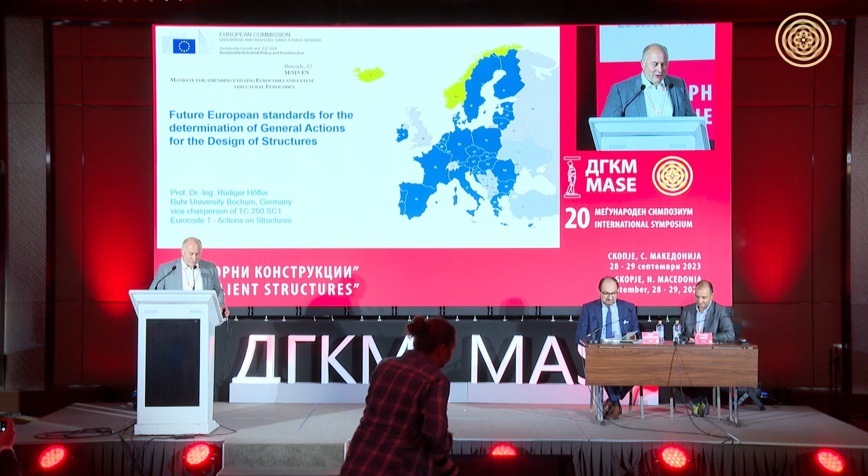Thank you very much for your kind introduction. Yes, to be an honorary member of MASE is always a big joy. Every 2 years I'm allowed to come here and participate in your esteemed conferences. Ladies and gentlemen, it's now late in the conference, and I think my task is not to produce too much delay. We have attended very ambitious lectures. Especially the invited lectures have brought us visions and shown us how exciting our field of activity is.

My presentation brings us a little bit back to everyday work, as we are every day guided by codes. Codification is something where a lot of experience is in, and therefore I'm happy to be in the circle of experienced experts in the code work. I would like to inform you briefly about future European standards. Please note the subtitle, General Actions, so it is about actions. And I'm doing this as Vice Chair of TC 250 SC1.

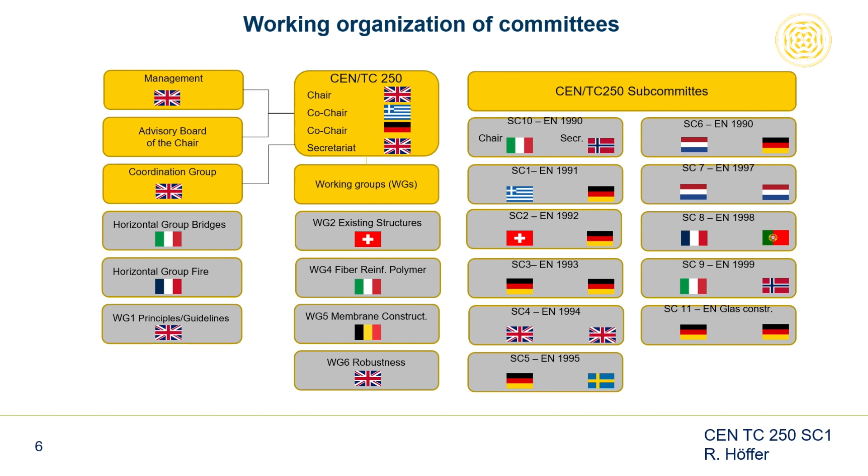The coordination group has its seat there, and TC 250 has a variety of contributors there, and you can see that many countries are contributing and some countries not. And that is, of course, a question of resources, a question of tradition as well. I must really say, and this is my personal opinion, that the number of flags to be seen here could be really increased.

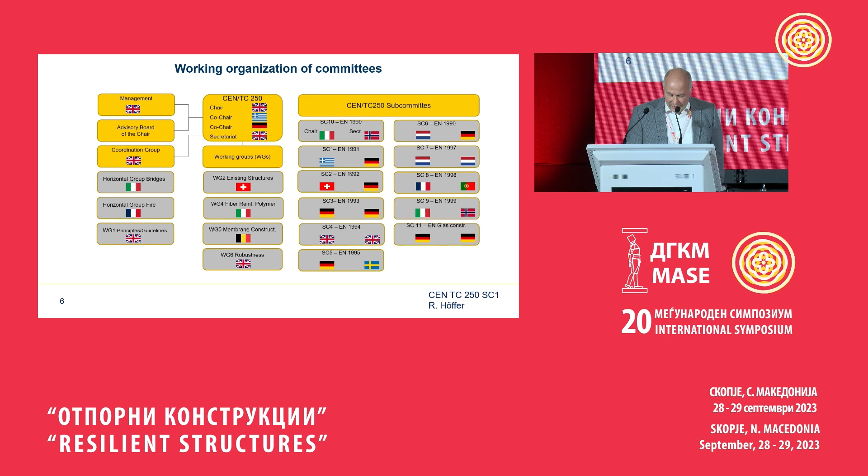The implementation in the countries is another question because national application documents must be produced, and that, of course, will bring a lot of additional effort and time will be used for that. After these introductory words on the procedures, I would like to go a step forward with some remarks about the different parts, but that shall not take too much time.

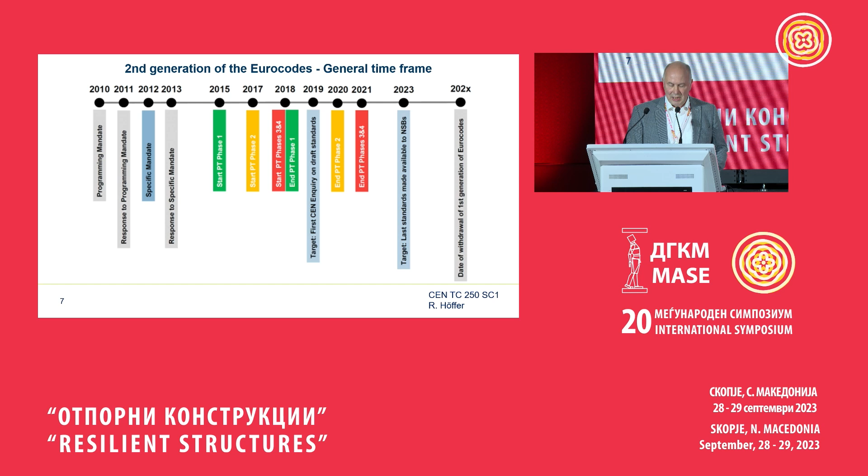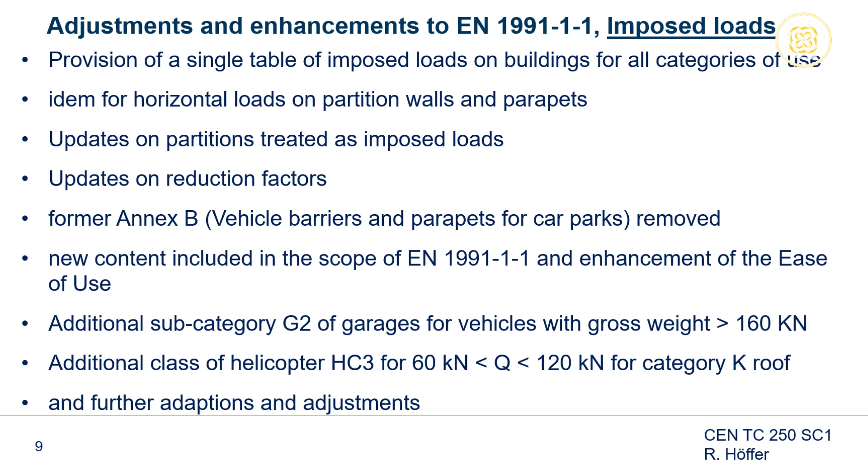Some adjustments and enhancements have been done, but these are solely of editorial, maybe a little bit more than editorial changes only. There are also new values due to the fact that, for example, imposed loads are increased, especially for vehicles. Vehicle weight is growing, especially due to electric cars, also helicopter weights, also garage loading, things like that, and further adaptations and adjustments are enclosed.

But I think that will bring no problem, and there are a lot of NDPs so that one can fix such a new code with own knowledge and own measurements in the country.

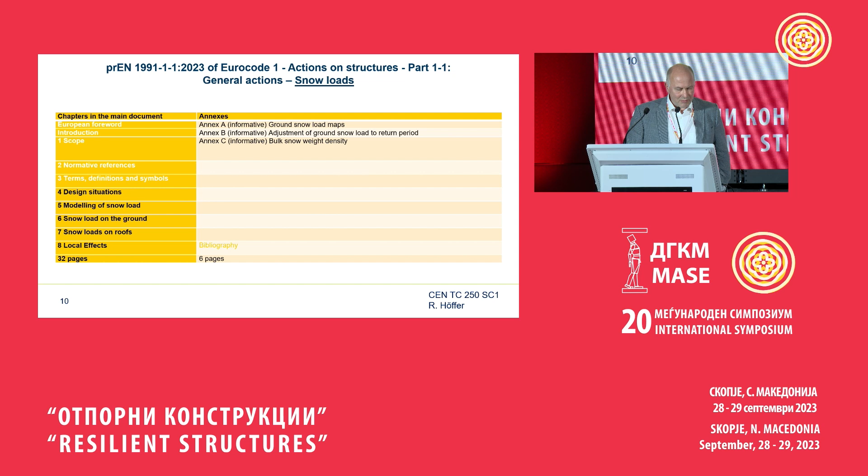Snow loads, there was more discussion here, but the extent is also not very large. Again, the first 4 chapters or 5 headers in the regular schedule, and then we have here design situations, modeling of snow load on the ground, snow loads on roofs, local effects, 32 pages. It follows again the classical pattern, but we have here introduced also, so if I say we, then the working group which was responsible for that, new models for snow loads on the roofs.

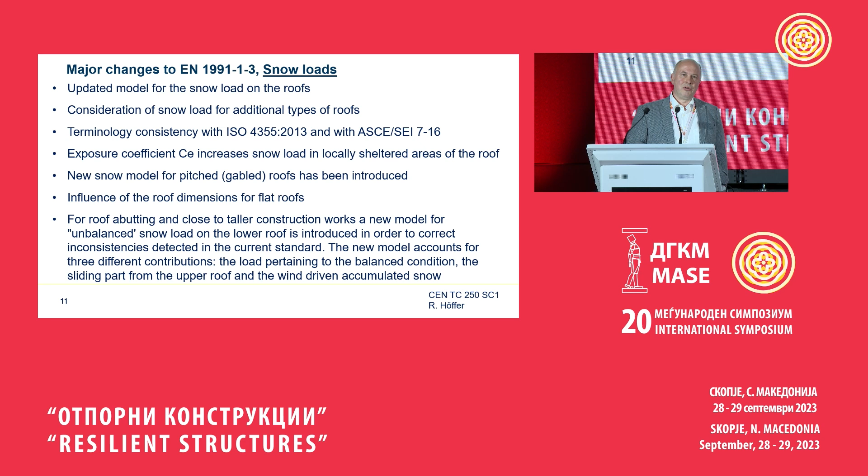And this new model takes account also about the question, is the right thing to use the characteristic value of snow load on the ground, or do we have to look for something more forwarded, and that could be, for example, the question about the size of the roof. If one has a very large storage hall, then the snow load on the roof must not any longer be reduced with the shape factor 0.8, but now there is a stepwise increase to 1.0 due to the fact that there have been building equipment developments to insulation, and also the pure size of the building will avoid snow drifting, so that 1.0 is the right value.

That has been discussed many times and will give, of course, some impact on static design. Of course, the building stock has not been changed then, but if new buildings will be erected, that has to be considered. Exposure coefficients are a little bit adapted, new models for pitched and gable roofs, and also abutments have been treated. So also nothing serious, but maybe there is the necessity to review that in the national standardization body and looking at reflecting comments from the expert public.

Maybe you can see here that most of the annexes are informative. That means these are recommendations, and the national standardization bodies are free to formulate adaptations, also to formulate completely new annexes. But the annexes as they are, they fit better in the procedures and are also reflecting the state of the art. There are only a few normative annexes. That means when accepting this code, one must use these normative annexes, otherwise the code is not applicable. So, for example, we cannot apply Chapter 5 or Chapter 7 wind actions when not having at hand some aerodynamic coefficients, and these are given in the annexes C, D, and E, and so these must be normative.

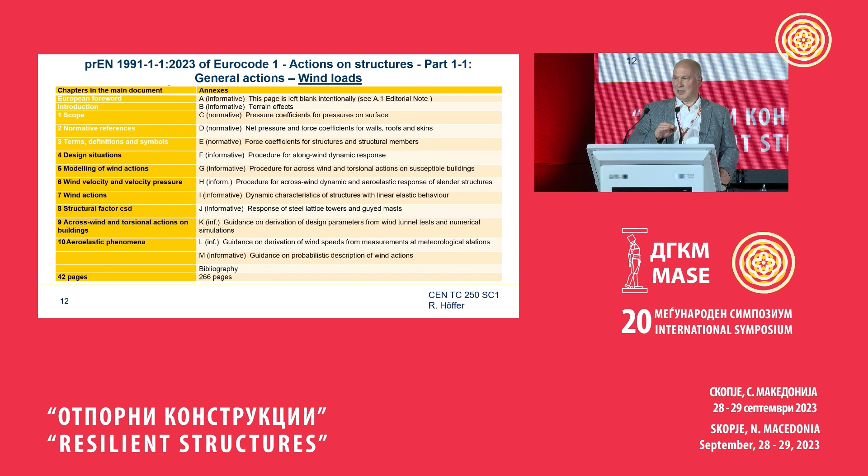But in this annex again, at several places, there are nationally determined parameters. So, for example, when measurements are available for certain structures, then it is possible for a national standardization body to change also piecewise coefficients there, if it is allowed by a nationally determined parameter. So the pure extent of this code will be problems when creating the national annexes. But let me please at least give you some examples for that and some guideline, and also maybe this is also some motivation to get into the topic.

The scope of the application of the standard has been increased to 300 meters height. So one could ask, is that really necessary? Yes, it is, because we see that in the growing cities in Central Europe, we have building heights that really come to this limit.

The highest office building in Germany has exactly 300 meters, and buildings in Great Britain could not be designed before based on the code models for wind, because these wind load models were only up to 200 meters. And that was, of course, a deficiency of the old code on wind loading, and now it has been extended to 300 meters, and by this also created some interesting comparison.

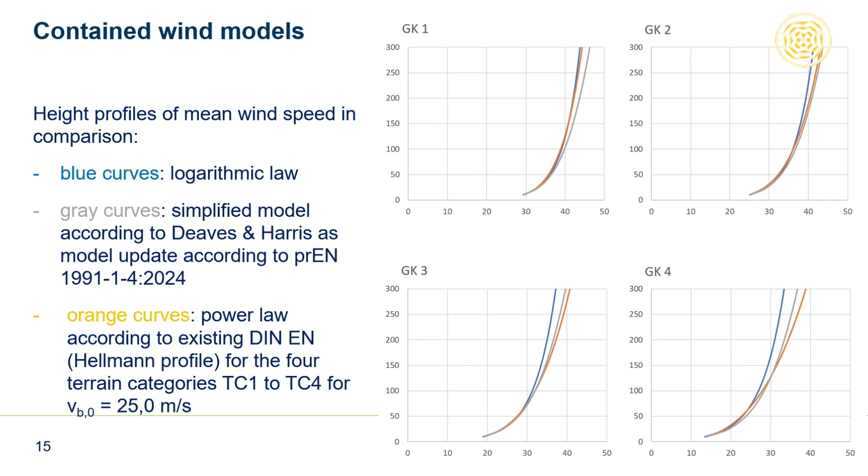And we can see that at this terrain category with a low roughness on the ground, the blue and the orange curve fit well together. Well, this is not surprising, because the logarithmical model in first instance reflects small roughnesses on the ground. So let us say green grass near to the coastline, flat terrain, no houses, low bushes. That is terrain category 1.

And that was developed by Professor Prandtl from Göttingen in 1905 as a good profile. The first time it was available to know something about boundary layers, and that was implemented immediately to regulations. And so the Hellmann profile is the verification by meteorologists in the atmosphere.

That fits well. But if we go then, for example, to terrain category 2, which is the standard terrain category, I would say it is terrain around airports, or in flat terrain with houses and bushes and some small, let us say, industrial buildings. There we can see that now the picture is different. There is a deviation as well from the orange curve, the Hellmann profile, and also of the gray curve from the logarithmic profile, and that has been adapted now here.

The more roughness we have, the higher is the difference between the theoretical logarithmic curve and the validated curves from meteorology, and therefore now, using this new wind model, it is possible to extend the code to 300 meters height for all those countries who have not automatically at the beginning used the Hellmann profile.

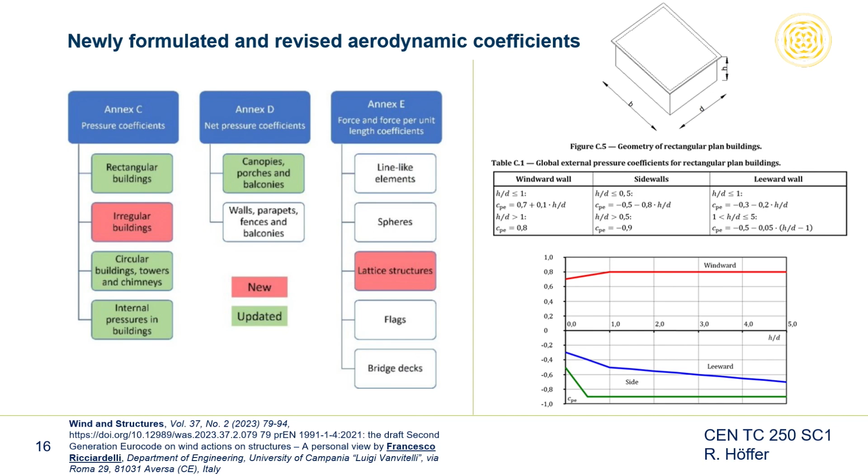In the countries where seismic activity is much higher than in Germany, there is always a lot of horizontal stiffness due to that point. But in northern and middle European countries, it is always a question which horizontal type of loading gives the decisive values for stiffening. And for example, for bridges and for high-rise buildings in our area, wind is mostly the relevant parameter for horizontal stiffness and not seismicity.

Therefore, it is important for industries and consulting offices in that area to be able to pre-calculate quickly foundations and stiffening systems. And of course, varying shapes of buildings have been considered in the new code.

These are patterns which really exist. One had done some work to make it a little bit more abstract, a little bit more general, but these are building systems which really exist, not only in plan view or section, but also forms like this are now possible and regulated.

A special effort has been done for dynamics. We have the phenomenon that wind excites buildings to resonant oscillations, susceptible buildings with low damping, typically high-rise buildings, bridges, and towers. The standard structural factor CsCd considers a size influence, which is a favorable effect lowering the load, and a dynamic influence, which excites resonant oscillations, increasing an equivalent static load.

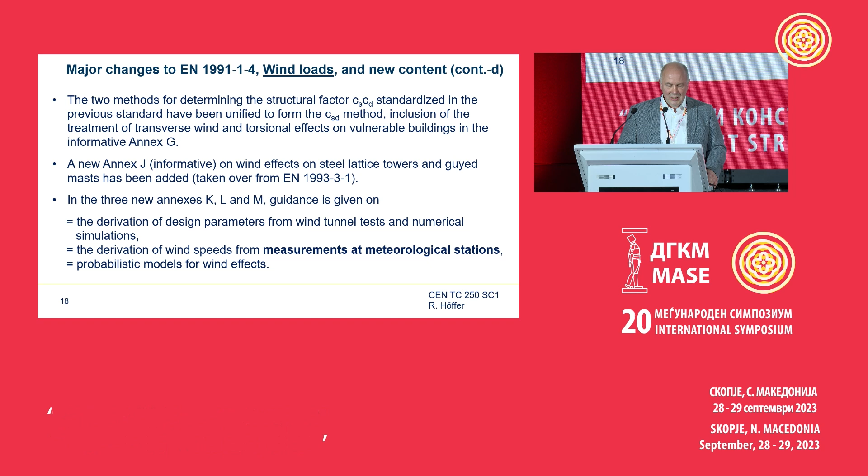Both are used together, and we have now put into a little bit adapted procedure where also mode shapes with changing sign can be considered. That is the CSD method, now in the informative Annex G, and communities must decide whether to adopt it or not. It is an informative annex, but it is an offer and a development of the formerly relatively inflexible procedure. Annex J was a special wish from the British for steel lattice towers and guyed masts.

We have three new annexes, K, L, and M, which take position with respect to very modern approaches like numerical, CFD methods in flow dynamics, which are more and more used. That needs guidance and regulation, because there are already at least two big design programs that allow for that, and it must be regulated since it can deliver non-validated results. This is not a topic of today, I just wanted to make this remark.

Also, the derivation of wind speeds from measurements at meteorological stations is now commented on in the code, and probabilistic models for wind effects as well. Of course, all these annexes are informative and are used to inform the professional public.

Another thing is very interesting, which cannot be solved so quickly: a European wind zone map. This was intended to be implemented into the code, giving the possibility of having only one wind zone map for all Europe. Apart from the problems we already have nationwide, for example when bridges are crossing borders, or bridges are built at positions where no meteorological stations are, then one runs really into problems.

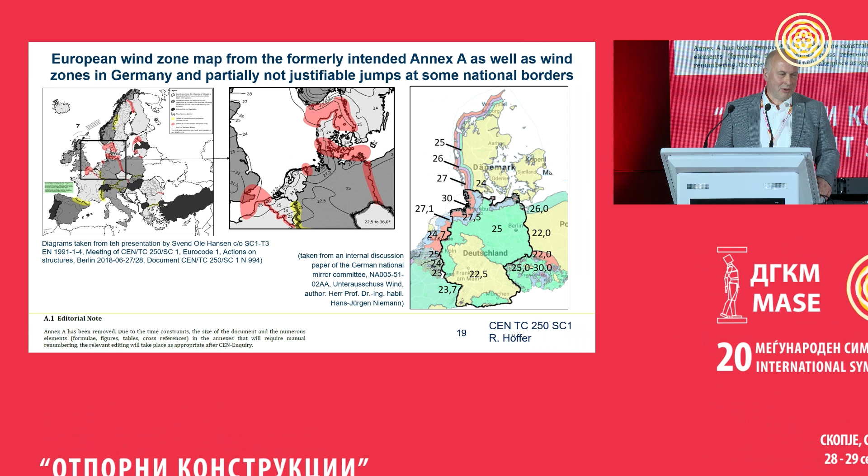We are now working at the new Sava Bridge in Belgrade, and there is a similar case. The meteorological station is a little bit apart, and it's difficult to define a fixed wind profile there, also because it is a river valley, and canalization might occur. I hope to be able to inform about that a little bit later.

But a special point gives a little bit of concern, namely the jump of characteristic wind speeds at national borders. Of course, that cannot be, that can only be in certain cases. Please take it with the right tone that I use the Danish example: in Denmark, we have big differences between German and Danish wind speeds.

Maybe you can see it best on the right-hand side. There we have our wind zones 25, 27.5 and 30 near the border, and the Danish have lower wind speeds, although when thinking about North Europe, this is the area where there's a lot of wind.

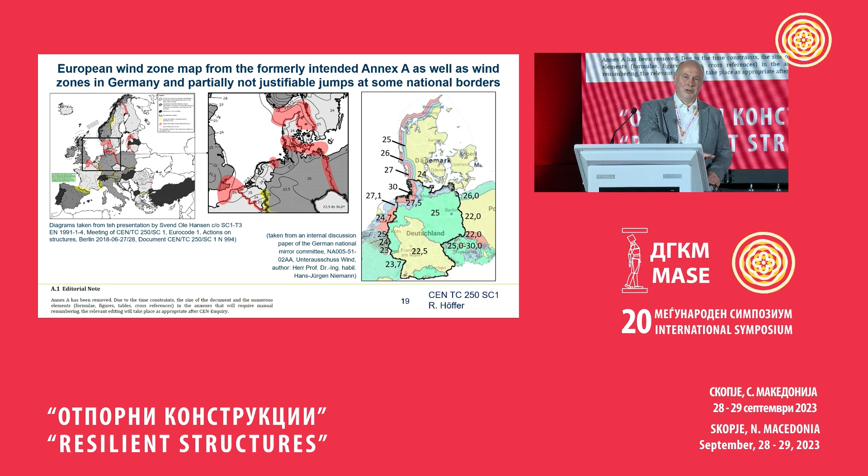I discussed a lot with experts there, namely Svend Ole Hansen and other people from that country, and they found out that part of these measurements have been done at 85 meters height on platforms and bridge pylons and then calculated down to 10 meters height, whereas the Germans do the other way around: they measure at 10-meter height and then evaluate it directly. But this is something that must be harmonized in Europe, because we really have problems with that.

I was also a witness and expert working out a written paper for a court about damages near the German border in Denmark, and it always came out that maybe the wind velocity was taken a little bit low. But I have the feeling that we are on a good way, so we will find harmonization in the near future.

Other places are also present in Europe. For example, the borders between Great Britain and the Netherlands, Great Britain and France - there are all jumps in the wind profile, a big problem for a European wind zone map, and that will take some years until that appears.

Another point is vortex shedding. Vortex shedding is something that brings stacks and chimneys really into danger, not by sudden cracks and failures, but mostly by fatigue. We have two different vortex models in the current code.

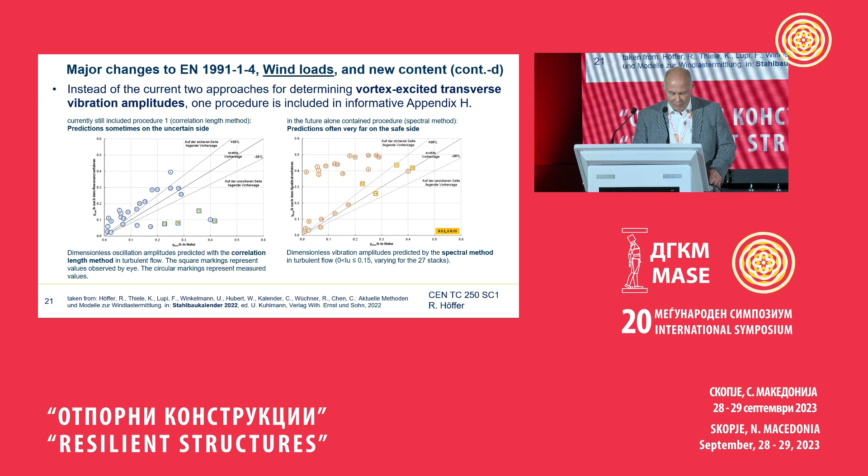Industries prefer the left-hand side, owners prefer the right-hand side, and we must find the right solution here. We did that by removing one of the methods from the code and fitting the other one through a lot of investigation, especially again a Danish laboratory contributing there, and also German laboratories, including our own, and the result is now offered to the public.

There should be some comment. Now let me speed up for the thermal actions - not much to be said. I can jump here and immediately point out that characteristic temperature components and temperature differences have been found. The new thing is that certain bandwidths are introduced, which again create effects for bridges with respect to their temperature dilatation. These uncertainties are again a matter of discussion in the national standardization bodies. It's quite clear that these uncertainties are higher where temperatures are higher, so there is some gradient from north to south, and every national standardization body must find its own solutions.

I jump over this slide and go to the accidental actions. More emphasis has been put on consequence classes, and there is also now a new annex on debris. Internal explosions have always been implemented - these are gas explosions in buildings, housing - and the compatibility with the basis of design code, Eurocode 1990, has been increased. And then there is a totally new part, and that is atmospheric icing.

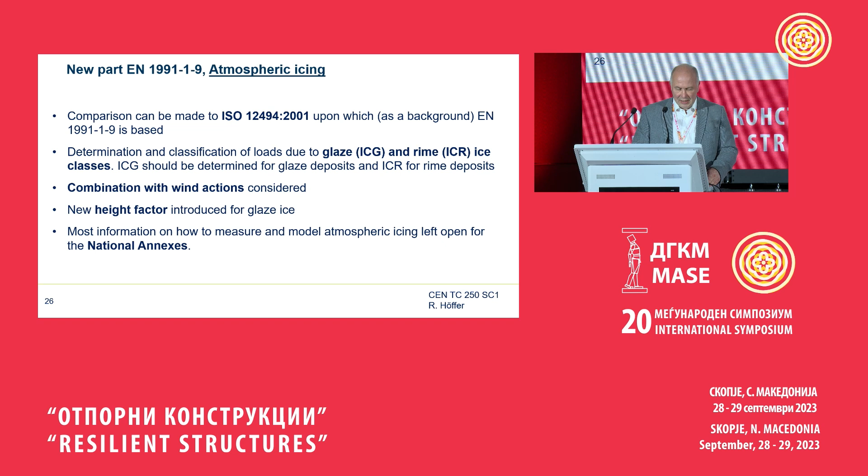That was designed after the ISO pattern from 2001. We again have glaze and rime ice classes. I think that is known to most engineers, and it has been updated and amended a little bit here. There is now a height factor for glaze ice, and the models are left open for the national annexes. There is a lot of flexibility.

By the way, I should say we are currently running a big project involving two climatic wind tunnels. There is one climatic wind tunnel again in Denmark, so there's a lot of cooperation with Denmark - in Lyngby they have a big climatic wind tunnel, and we are going there to do a study on atmospheric icing. The second wind tunnel in Europe working with that is in Prague, at the Czech Academy of Science, and comparative experiments will be done there too.

Now we have seen the last three codes commented on, or three of the codes commented on.

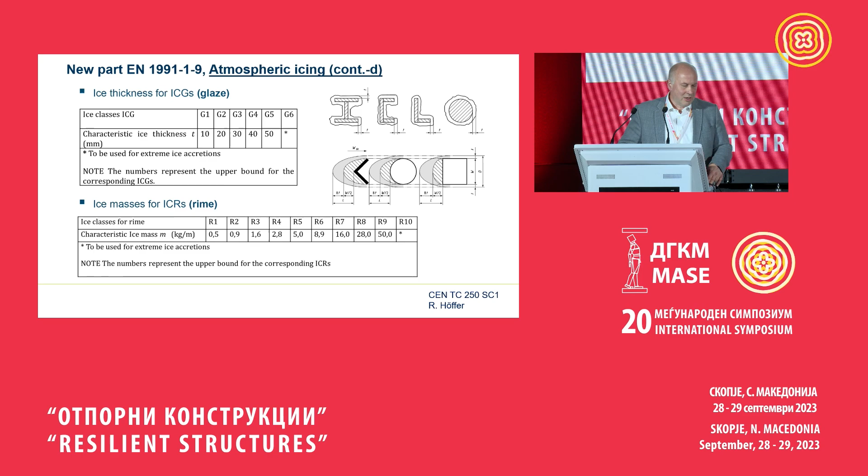They have to do with climatic actions. The question is immediately there: climatic actions have to do with climate change issues. How can we tackle that? Here, of course, uncertainty grows tremendously. That's also something related to the fuzzy question I posed to Professor Katzi this morning. Markov chain and Bayesian procedures cannot be used here because the uncertainty is too big and has no clear pattern. This is an open question, how to tackle that.

What happens is that flooding can be seen in a tremendous way in your neighboring country, Greece, just in the last days and some weeks ago. Tremendous effects. We can prove that with high confidence intervals, statistically also. A change of the extreme values can be seen, clearly visible, can be proven, and we cannot deny that this effect is there, especially regarding flooding.

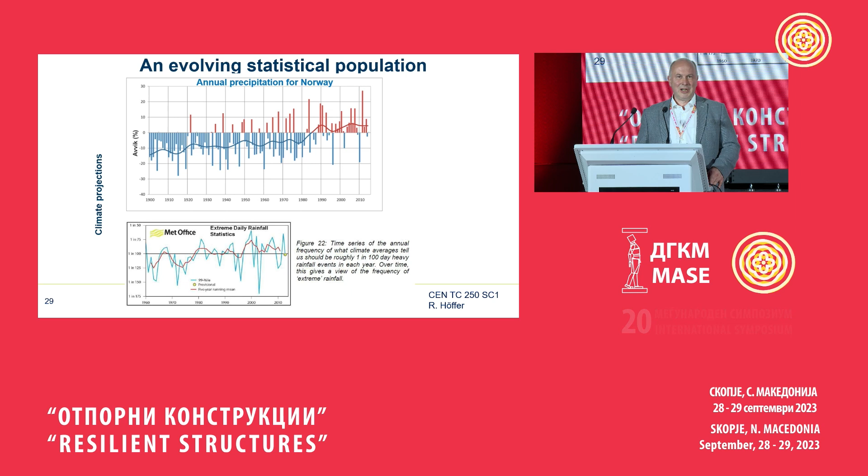By the way, I did not comment on the new code on waves and currents, but in the new code for waves and currents, these parameters describing these effects must be implemented. And that is a little bit far from state of the art because the predictions are uncertain.

We have seen, for example in Germany, increased icing, although temperatures are higher than before. Icing is not lower, and also snow loads are not decreasing. That has to do with the humidity content of wet snow. Also here, the characteristic values have high uncertainties, and temperature is, I must say, the value that can be measured best, because there only simple sensors are necessary, and also long data bases are available.

Here we find an example from the Czech Republic, done by the Klementinum in Prague, and they found out that they have to increase their shade air temperature and the temperature differences for buildings.

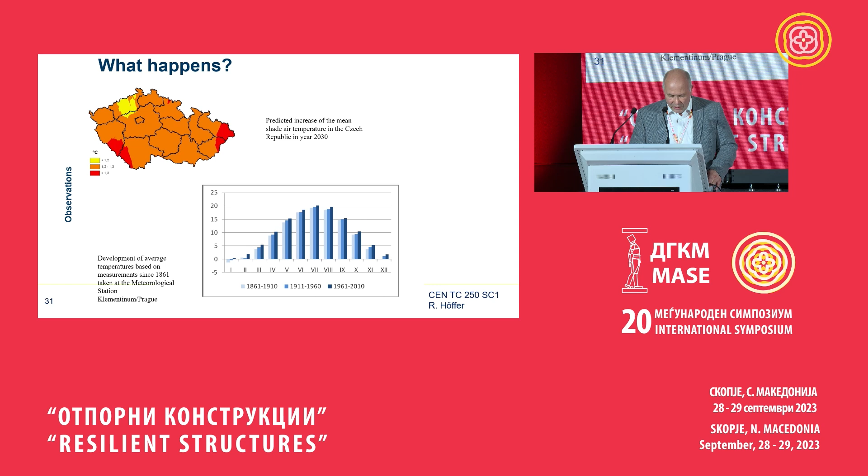When considering wind, we have to face a certain problem. From all climatic sources of loading that we know, wind is the most unknown - the most extreme wind is the most unknown one. Not only extreme wind, also everyday wind. We are not sure if the quantity of storms will grow. We are not sure if the extreme values are growing at the moment. We don't know if the number of tornadoes is higher.

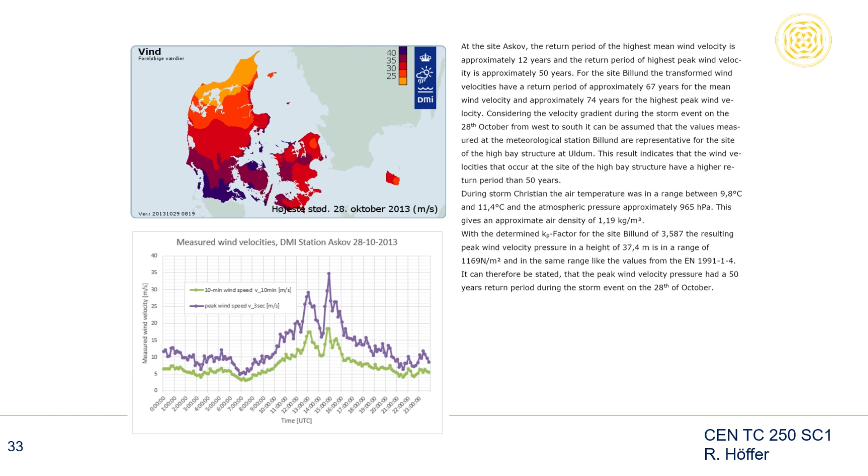For a pure mechanically generated turbulence like a deep pressure wind zone - one of these deep pressure zones that come from the Atlantic and cover Europe producing storms - that is well understood. We know the gust factors which belong to that, something between 1.4 and 1.7. But here we can see that there was a factor between the green curve, the mean value, and the measured - not estimated, the measured - gust wind speed of more than 2.

So absolutely unusual, and it was not clear what this was. After some consideration, it came out that this was a thunderstorm, but a special thunderstorm, a downdraft, implemented in the first vortex of the deep pressure zone. These effects are temperature dependent, and they become more frequent. So that is a very complicated source for a new phenomenon that comes up more often.

So I guess that the gust factors have to be improved, and that is also something where a lot of research is ongoing. The Italian Giovanni Solari took an ERC grant on that and formed a big laboratory in Genova. Very unfortunately, Giovanni died one year ago from a disease, and his team is continuing this research, along with other groups in Canada and the United States. That will surely change our gust factor.

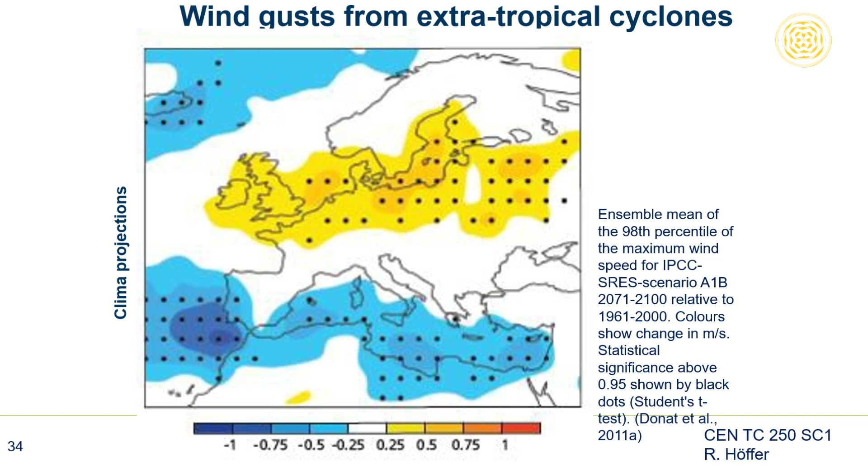And what you can see here with yellow colors, that is a slight increase of wind speed, of extreme wind speed, and blue color is lower wind speed, and that is a prediction to the year 2100. So within the time frame for which we plan important structures. But the difference is not so large, so we can see that in Europe we come up with up to 0.75 meters per second more. That means only very, very moderate corrections of our characteristic values. That will be absolutely different for other climatic actions.

So let me come then to a conclusion for the climate change coverage. That has been proposed by a document from TC 250, and there will be introduced a factor, but this factor is, from my point of view, pure formalism, because this factor has no life inside it. There is no number for this factor. At the moment, the factor is 1. It's only a form to deal with it in future. And I think much more work of enthusiastic, especially young engineers is needed, because we cannot come up with such a thing and just say national standardization body, find your factor. Then it's not very interesting to do that.

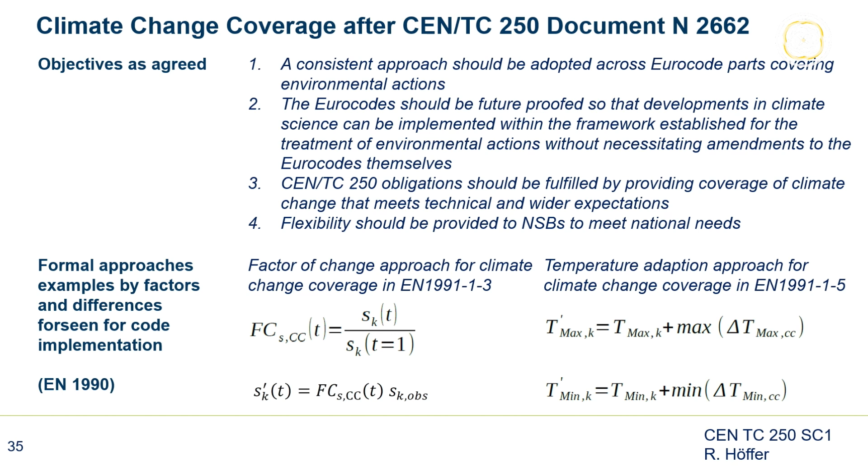So to end my short presentation here, I would just give you an overview about the codes I was reporting on. The status is that the inquiry phase for these parts is running, with the exception of wind actions. That is a year later due to the big extent of new procedures which have been implemented. The inquiry phase means now opinions and comments from the expert public are asked for, and then shall be formulated as a comment to the project teams, or better said, to the working groups, and then such a proposal shall be implemented or not.

We have found out that user friendliness was not put into question by the test users and also by the publics that got already the codes. The harmonization was also very welcome, with the exception of very few procedures. Especially positively accepted was that the codes are open for new materials and new methods. So that was commented very positively on. The climate change issues were not commented at all because nobody knows numbers.

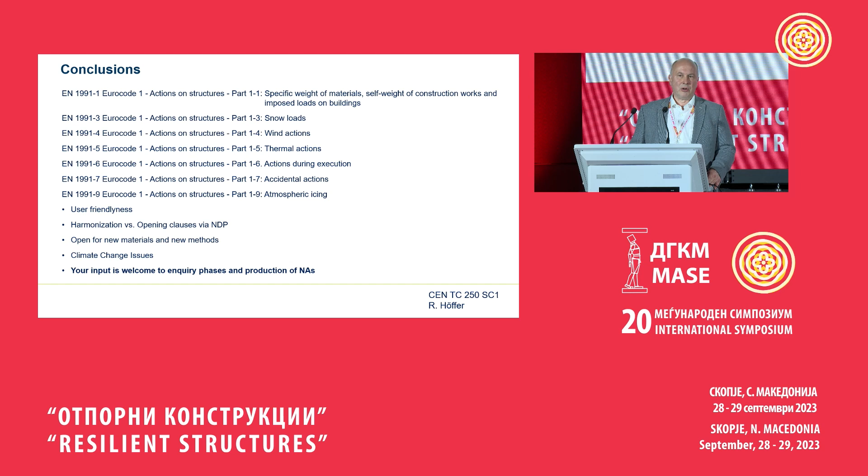And at the end, I must say that your input as people who work every day with codes like this is the most important thing, to discuss the codes now after the experts have made a proposal, and every opinion is very welcome to the inquiry phases. And if your country or your group is not part of an inquiry team, then I could only invite you to send on the short draft just a comment to me myself, and I try to bring it into this committee, and then maybe at least the opinion is not lost.

So, production of national annexes is the work of the next years, and with that I can close, and thank you very much for your attention.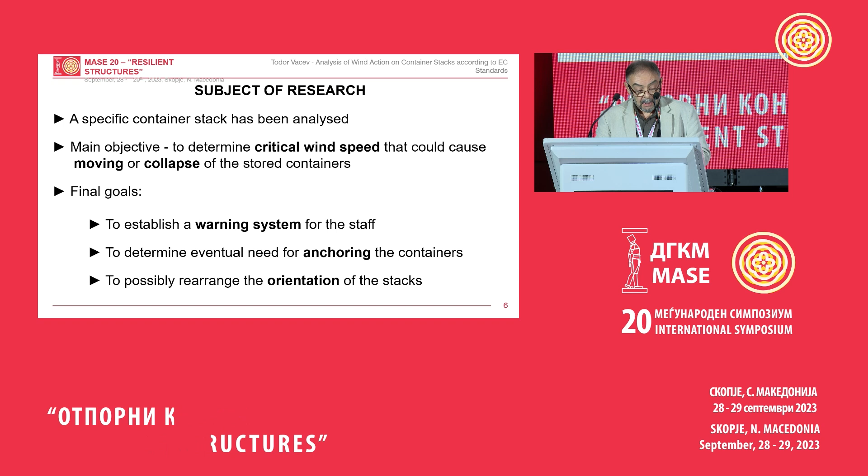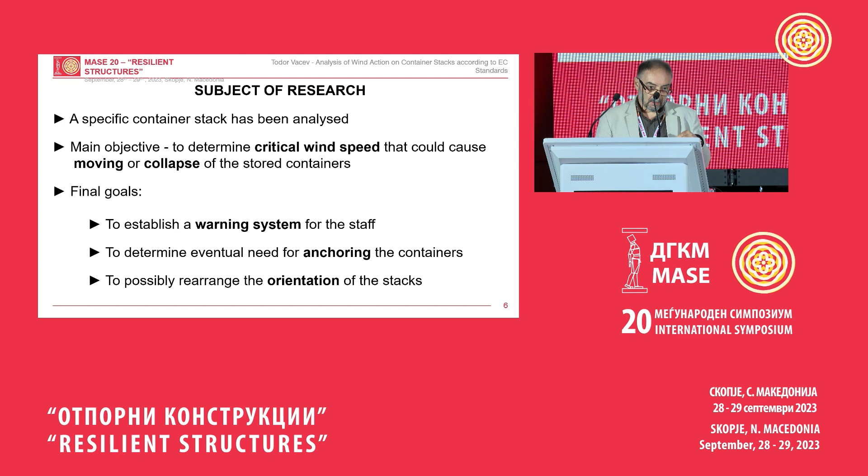The second reason was to determine the eventual need for anchoring the containers. Namely, in common practice containers are just put on the ground, and some are put above and above without any fixing, any anchoring. In some cases, especially on ships, they are anchored with some chains, with heavy ballasts, and so on. And the third reason is for the operator to consider alternating the orientation of the containers with regard to the main wind direction on that site.

Problem was that there are numerous stacking combinations. There is no order, there is no established pattern on every site. So in this research we had to narrow the selection, and you can see on this scheme what we analyzed. 4 cases with 1, 2, 3, and 4 levels of storing. And to further narrow the research, we considered only empty containers, as they're more vulnerable to wind action than the full ones.

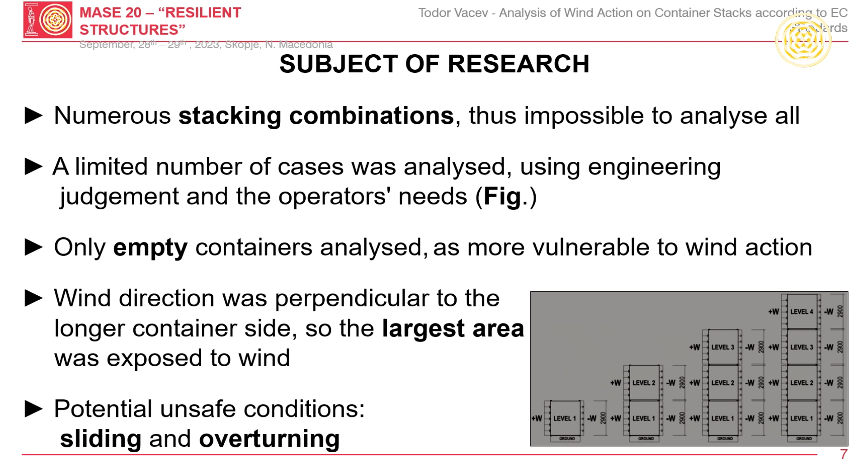Wind direction was treated as acting on the largest area of the containers, and unsafe conditions that were analyzed were potential sliding and potential overturning. Wind action was applied on windward and leeward sides. Lateral sides were excluded because they annul each other. They act in opposite directions.

But wind suction on the top side, on the roof of the container, could lift the container, and it could reduce the friction force. But in this case, we neglected that because it simplified the research, and also the containers have a pretty large mass, almost 4 tons, as you can see, so we excluded that. The container type is high cube, the largest one from the possible standard containers that are present on the market, and here are their dimensions. Wind intensity was calculated by the Eurocode standard.

Sliding and overturning are different phenomena considering the genesis of their arising, so they had to be calculated separately. And all cases were analyzed in 2 so-called modes. The safe mode, standard one for design, where we applied safety factors from Eurocode, and the purpose of this mode was to get some kind of wind velocity database for that site in order to safely operate.

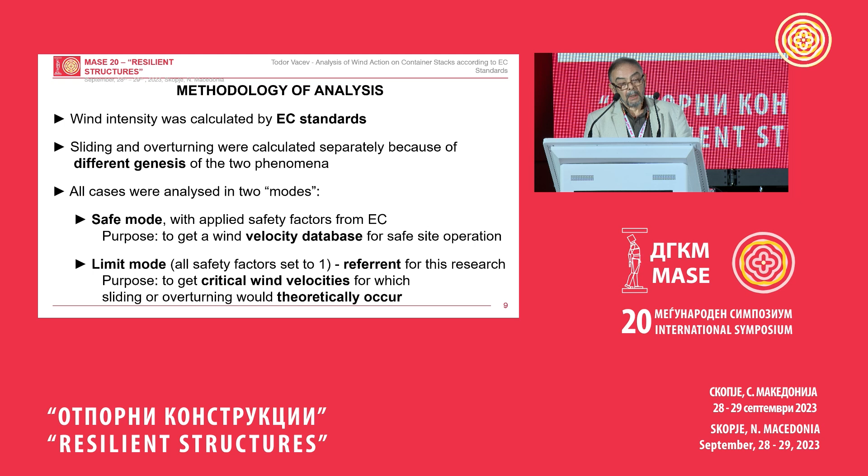The limit mode, second mode, all safety factors were excluded or set to 1, and this was a reference. We wanted to see what were the critical wind velocities where sliding or overturning should theoretically occur. The sliding check was simple, comparison of wind force and resisting force generated by friction. The overturning check was comparison between overturning moment from wind and stabilizing moment from container weight.

Regarding the friction, we had 2 types of contacts. The bottom container lying on the concrete pavement had a friction coefficient of 0.6, and the container that lies over another container, in that case we have steel over steel, friction coefficient of 0.4.

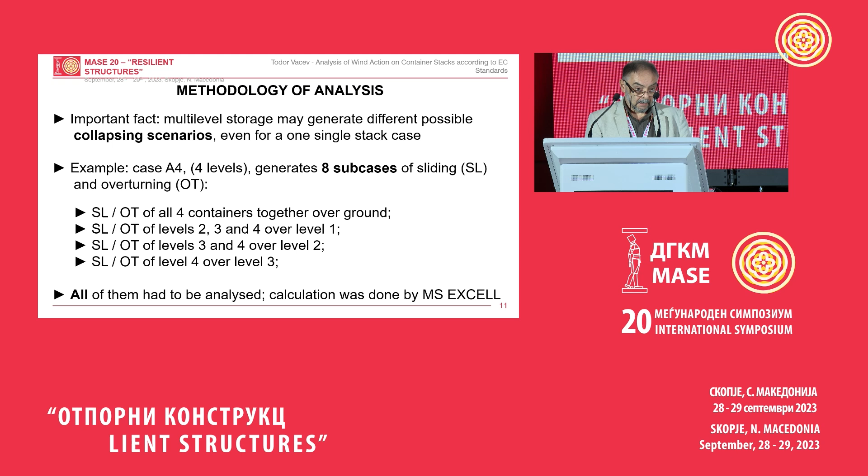The important fact is that this multi-level storage can generate many different collapsing scenarios. And that happens even in one single stack case. And here I gave one example. I will not read everything, but if you have 4 levels, it generates 8 subcases of sliding or overturning. And they are listed here, as you can see. So all of them had to be analyzed, and the number of calculations rises. It was done simply by MS Excel.

In conclusion, after the calculation, we observed that critical wind velocities for the limit mode are normally higher than for the safe mode. It's expected. But the differences are not uniform. They range from 33% for case A4.4 to 112% for subcases which are listed here.

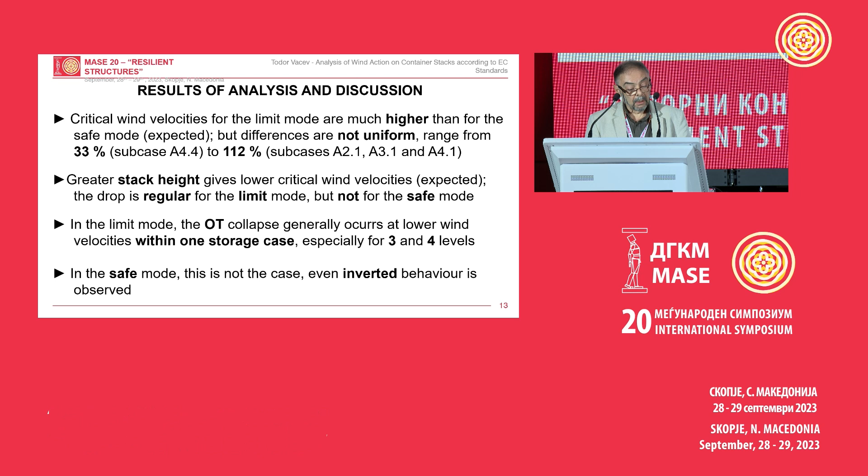Second, greater stack height gives lower critical wind velocities, logical and expected. But the drop in critical wind velocity is regular for the limit mode, but it is not regular for the safe mode. Also, in the limit mode, overturning collapse occurs at lower wind velocities within one storage case, especially for 3 and 4 levels. But in the safe mode, this is not the case. Even inverted behavior is observed.

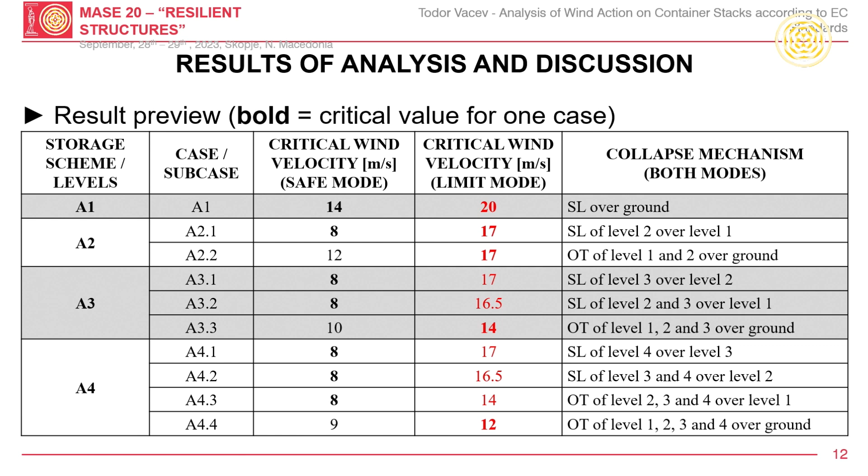As a conclusion, or several conclusions, we can say that the difference of critical wind velocities in the safe and the limit mode indicates that possibly Eurocode safety factors are over-conservative. Also, limit mode shows a more regular pattern of critical wind velocities when stack height is varied, and also when we consider only one single subcase.

Finally, both these conclusions suggest that some more sophisticated methods should be used, like contact analysis and finite element method, and also computational fluid dynamics combined with fluid structure interaction. At this moment, I can say that one such investigation is in progress, and we hope that we will soon have the results.

Thank you. Thank you, Professor Vacev. It's a really interesting problem that you analyzed. You were good with the timing, so we can take questions. Maybe I should go. Oh, it's okay. So, if you have questions. I maybe have a comment, if I may.

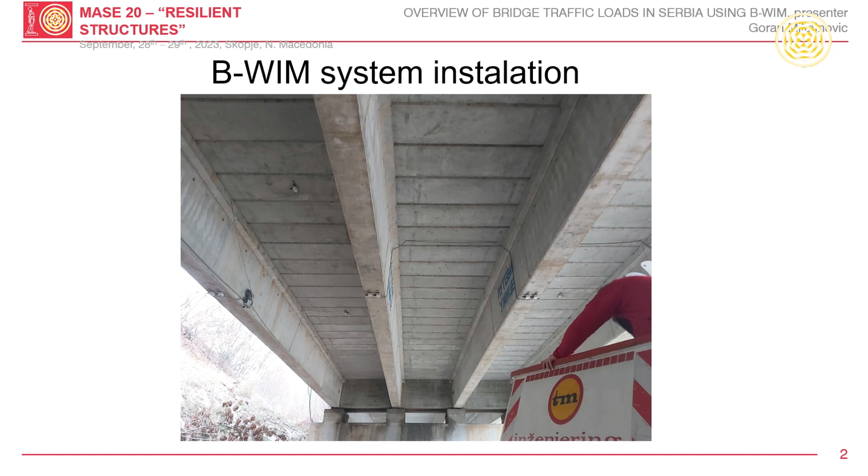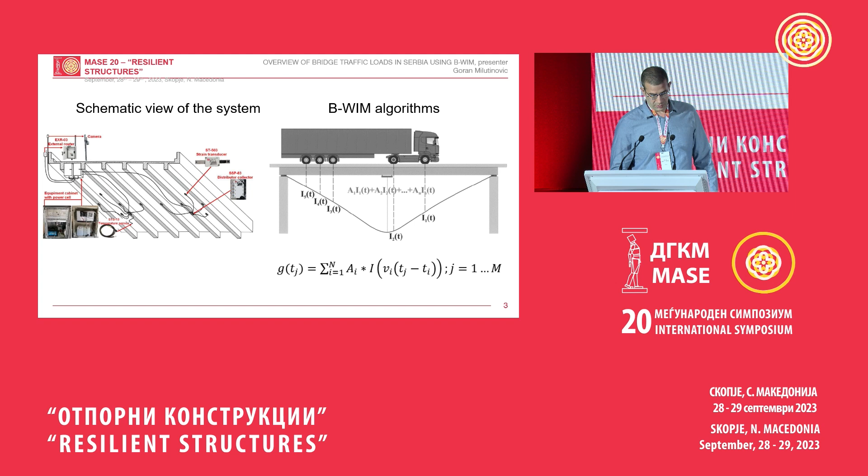So the sampling rate of this system is 500 samples per second, and if a vehicle is crossing a bridge for a couple of seconds, then they get a number of equations 2 orders of magnitude larger than the number of unknowns, the axles, and by some advanced mathematical tools, they are able to find out the unknowns, the axle loads. What's also interesting is they use the observed influence lines and not the theoretical influence lines.

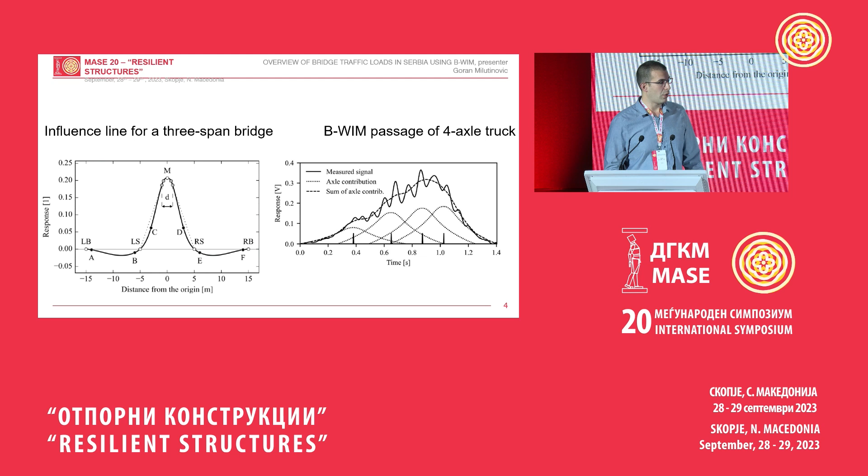You can see it's oscillating about the static effects, and basically, simply saying, they set a cutoff frequency. All frequencies higher than that are the dynamic component, and they're eliminated. What's left is the static component, and based on that, they're able to determine the static weight of the vehicle on the bridge.

So until now I was talking about the system. From now I will talk about the measurements that were done. Putevi Srbije, the bridge owners in Serbia, carefully planned the locations of the measurements, geographically covering the entire country from Zrenjanin to Pirot, monitoring freeways and highways, different types of roads.

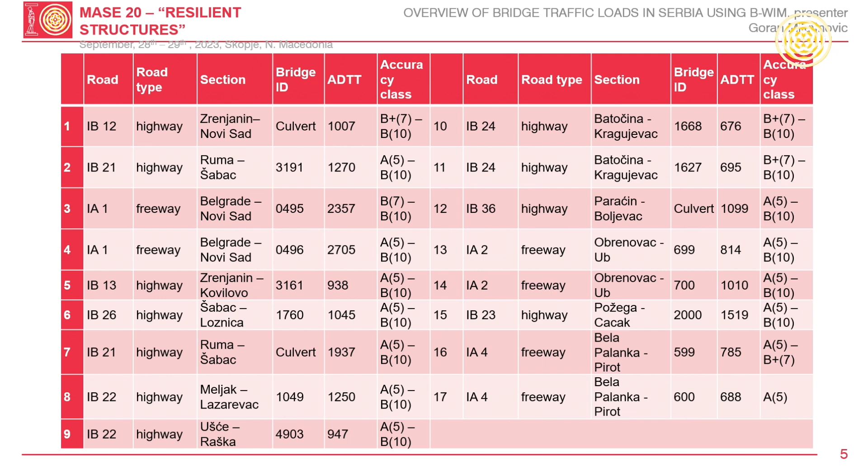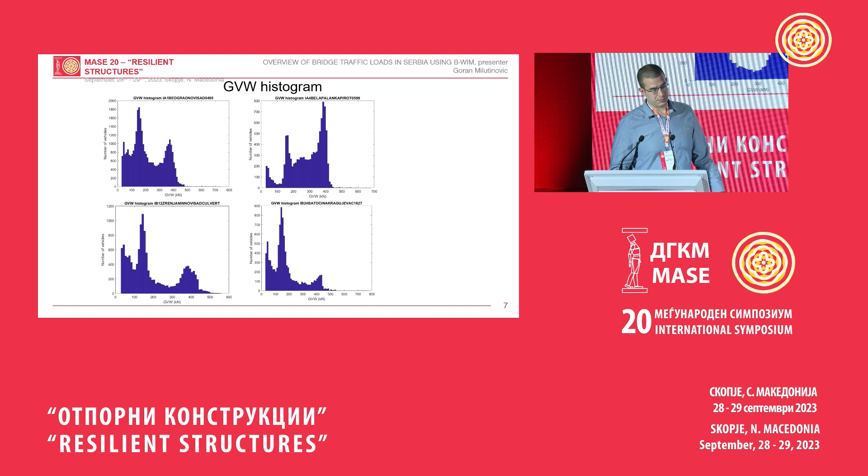Now this is GVW, gross vehicle weight. Given here are histograms of gross vehicle weight at 4 locations, 4 stations. You can see maybe 3 modes, the most frequent values, just above 3.5 tons, which is the limit for heavy vehicles. In this database there are no vehicles lighter than 3.5 tons. The next most frequent value is around 150 kilonewtons, and then also just below the legal limit for routine traffic, around 400 kilonewtons, after which there is a sharp drop, as expected because of the legal limit.

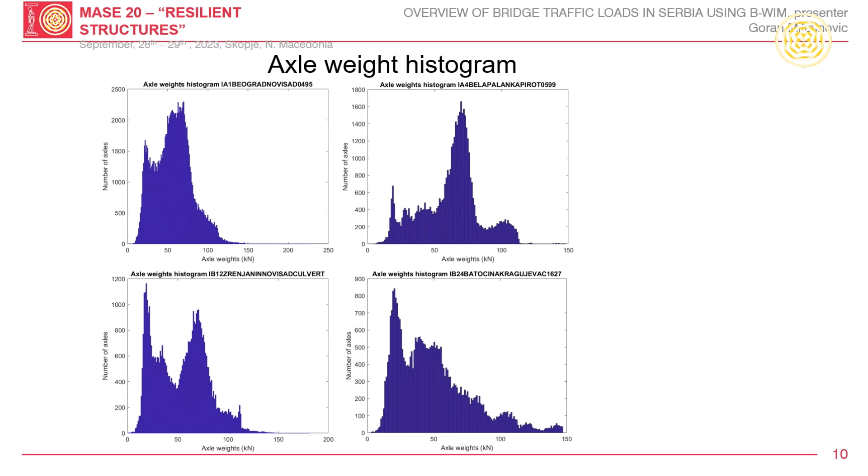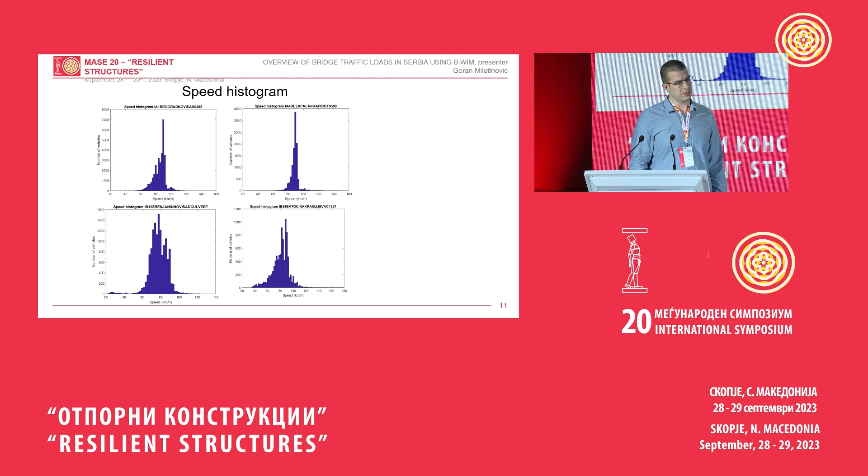Another histogram is for axle spacing. Again, the most frequent value is the tandem spacing. Now the axle weight: the most frequent value is usually around 75 kilonewtons for a single axle, and again there's a sharp drop after the legal limit of 113 kilonewtons. The last histogram is for speed, and usually vehicles run most frequently at 80 kilometers per hour.

So why are all these statistical representations important? Because these measurements that exist are very good, but they're short term. For example, in Switzerland they have much longer term measurements, lasting 20 years at 10 locations, and when you have that type of data, it's much easier to do a probabilistic study.

In this case, you need to somehow scale up and do simulations of traffic, because the final goal of this study is to determine the appropriate traffic load model for existing bridges in Serbia. So in order to do that, we need to do traffic simulations to extend the time range of the measurements.

As background, Serbian police as a public information source provided data about registered vehicles in the registry. On the left is the number of vehicles per year for all vehicles, regardless of gross vehicle weight, and it can be seen there is about 40% traffic growth, 40% more registered vehicles on Serbian roads, as we probably see by the traffic jams in Belgrade, for example.

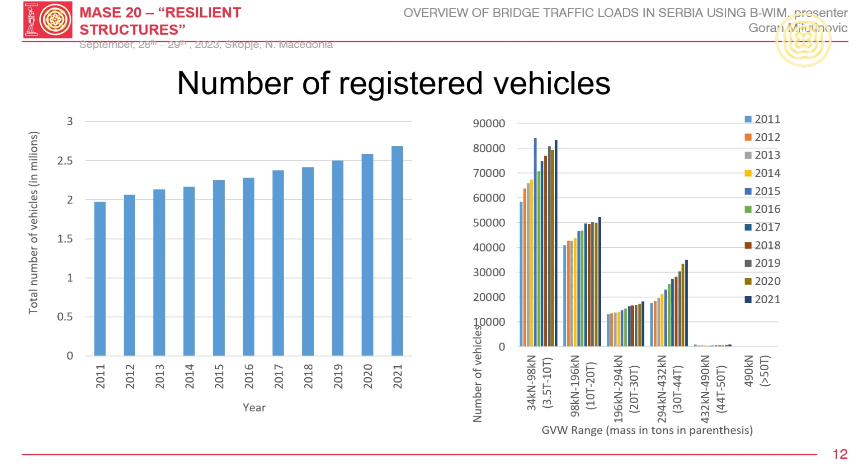On the right side is a very similar chart, but regarding specific gross vehicle weight ranges. What's very interesting for us is the range between 30 tons and 44 tons, basically those heavy vehicles, which almost doubled in 10 years. These two charts are basically some guidance regarding traffic growth, with the final goal of setting up the traffic load model for existing bridges.

As a conclusion, we provided an overview of the bridge weigh-in-motion measurements that were done in Serbia, and for us they represent a solid basis for the probabilistic study we are currently doing for the optimum traffic load model for existing bridges in Serbia.

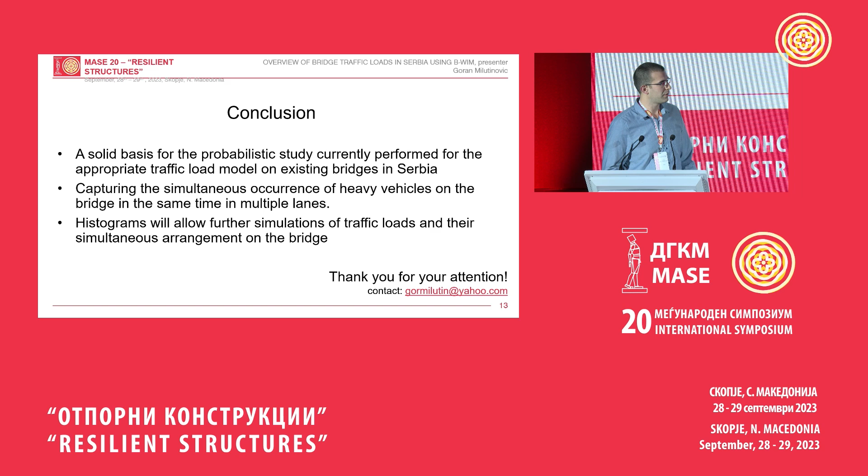What is the main advantage of these measurements for us is that we can reconstruct the whole traffic during that period of measurements, and we are able to capture the simultaneous occurrence of heavy vehicles on the bridge at one location at the same time in different lanes. The histogram that we showed will allow further simulation of traffic loads for the study that we are doing. So that will be all, and I'm open for any question.

Thank you very much for this nice presentation and keeping in time. Are these systems permanently installed in Serbia on the bridges?

Yes. They bought a system, and initially there were all these measurements that we showed. They were done on 70 locations, and since then they installed it on one location. It's now continuously recording. Yeah, these are very important data that can be used in many ways, also for design of fatigue, especially in steel bridges.

Any questions from the audience? Thank you very much.

Okay, so we are slowly coming to the last presentation for this session. It's titled Dynamic Behavior of Reinforced Bridges under Moving Load: a simplified numerical and analytical approach. The authors are Dejan Janev, Tony Rangelovski, Darko Nakov, Goran Markovski, and Peter Mark. The presenter is Dejan Janev.